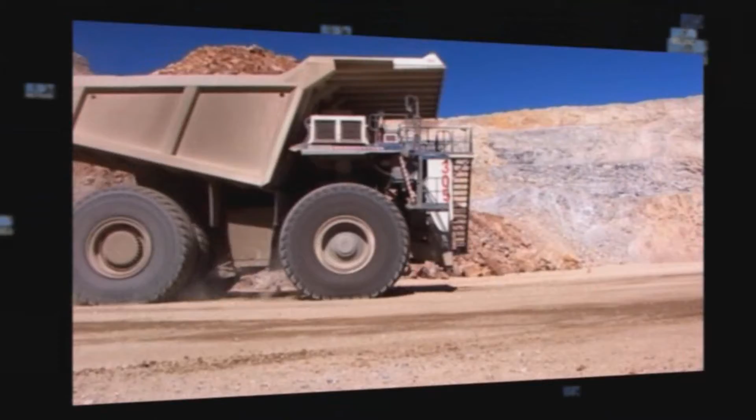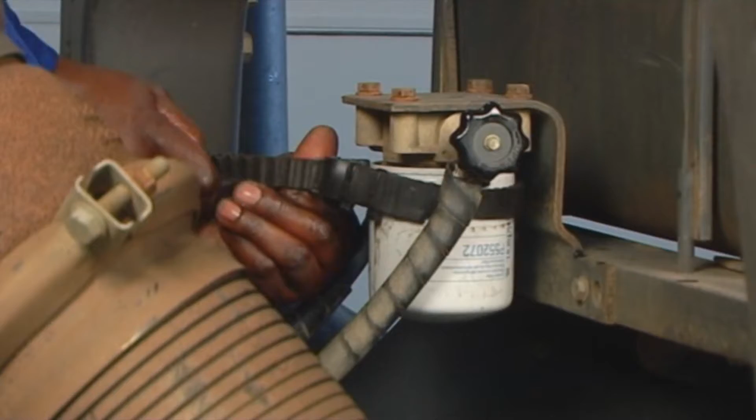One of the keys to consistent coolant performance is good service practices. With this in mind, the Donaldson Company has prepared these step-by-step coolant filter service guidelines. Before we look at the actual filter change-out steps, here is some important servicing information.

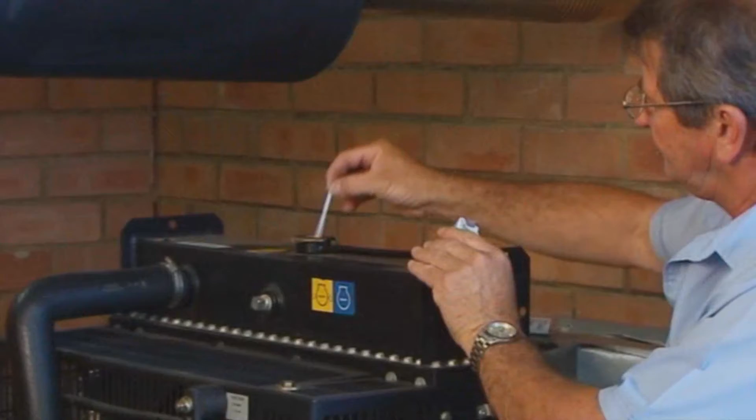Never use pure antifreeze, as it provides less protection than a water-antifreeze mix. In traditional water glycol systems, Donaldson test kits can be used for a quick 1-minute test that helps you maintain the cooling system chemical balance. Donaldson recommends testing traditional water glycol coolant systems at least twice a year.

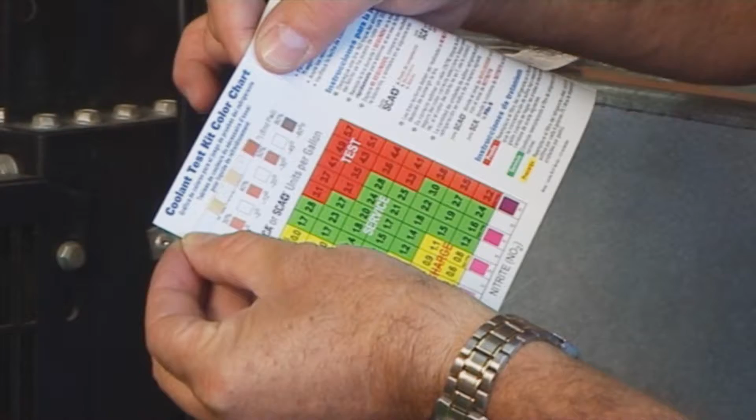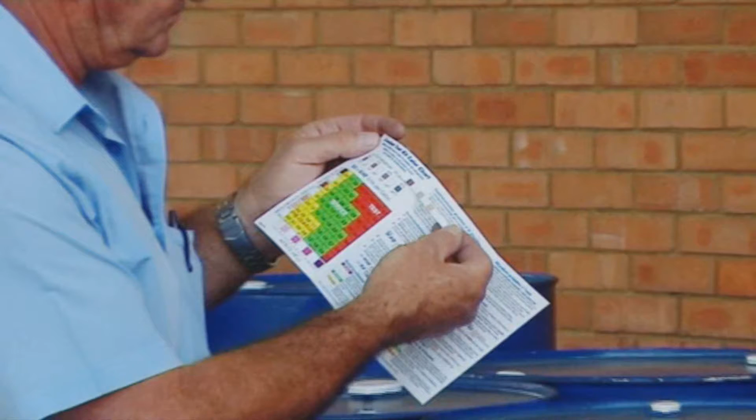Donaldson test kits are intended for use with SCA and SCA Plus systems. Full instructions are included with the kits. Systems using non-traditional organic acid technology should follow manufacturers' recommendations. Due to the difference in the chemistry of additives in organic systems, test strips cannot be used for testing organic additive levels.

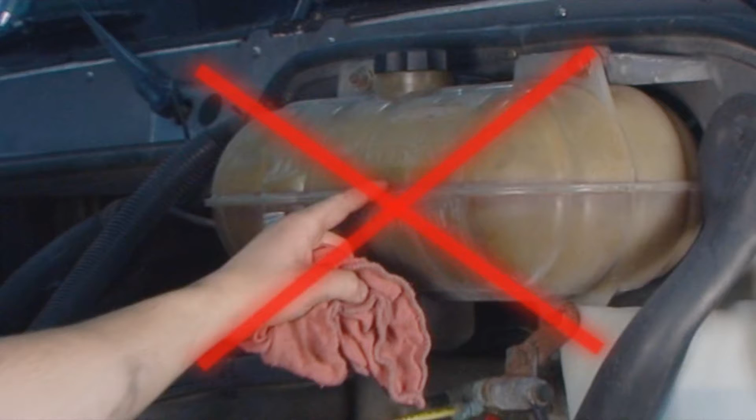To avoid system pressure and heat, the unit to be tested should ideally be allowed to cool overnight. To test, remove the radiator cap or take a coolant sample from the system petcock if so equipped. It is not recommended to sample from the radiator overflow reservoir. If using a petcock, drain off the first few ounces or 60 milliliters before taking the test sample.

Place the test strip into the coolant in the radiator or coolant sample. Remove, and after 1 minute, read the results according to kit instructions. If your traditional coolant system additive is below 1.2 units per gallon, or 3.8 liters, replace the coolant filter and add a pint or 0.47 liters of additional liquid per each 4 gallons or 15.1 liters of coolant.

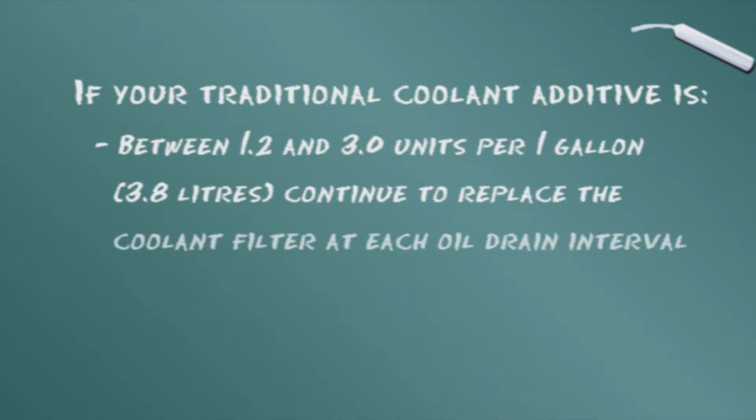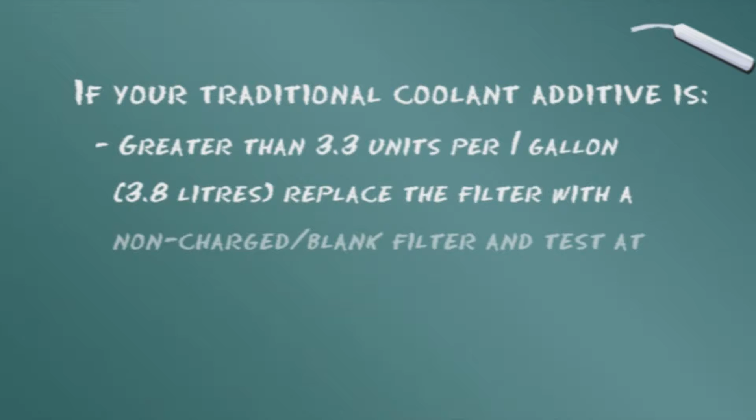If your additive is between 1.2 and 3 units per gallon, or 3.8 liters, continue to replace the coolant filter at each oil drain interval. If your additive is greater than 3.3 units per gallon, or 3.8 liters, replace the coolant filter with a non-charged or blank filter and test at the next service point. Repeat this as needed until the additive concentration falls below 3 units per 1 gallon, or 3.8 liters, when tested at each subsequent service interval.

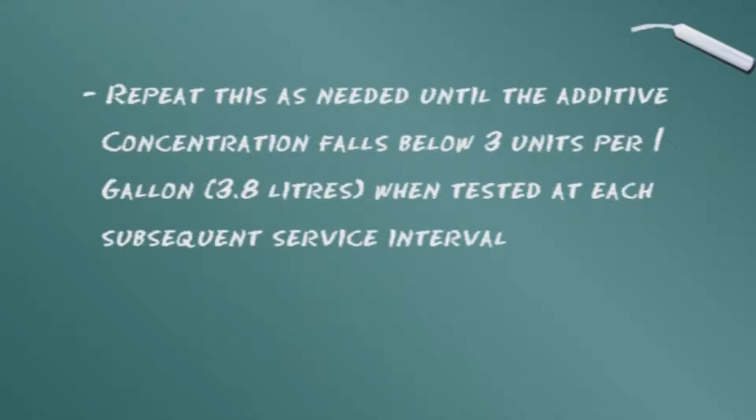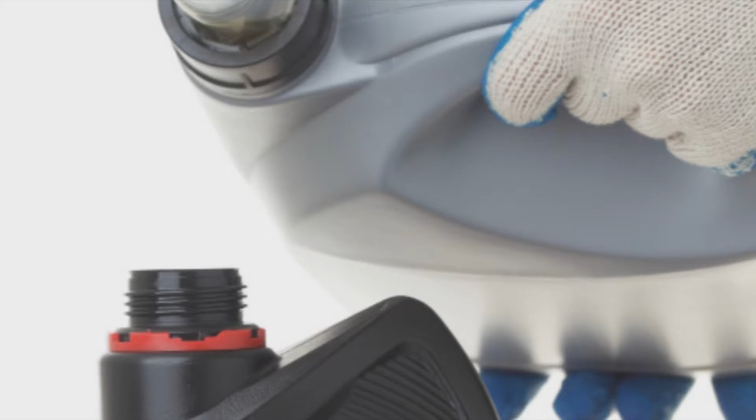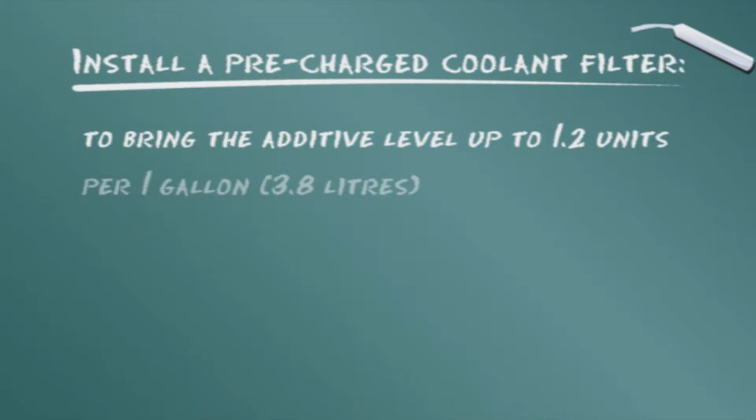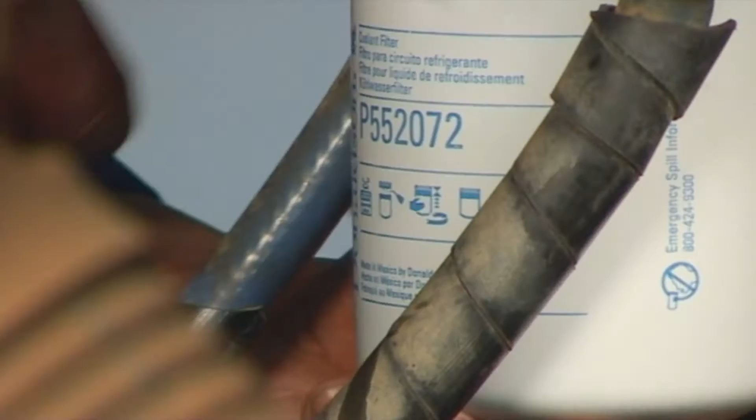Periodic drain and flushing to clean a system is important because while coolant filters capture large contaminant, sediment can accumulate. After flushing, the system should be refilled with the 50-50 water glycol mixture. Then install a pre-charged Donaldson coolant filter to bring the additive level up to 1.2 units per 1 gallon, or 3.8 liters. Alternatively, you can use a service filter with a lower pre-charge together with liquid additive to reach this desired service point level. Information regarding the Donaldson filters and service steps is simplified by pictograms on the filters themselves.

Now here is a brief review of the pictograms that are printed on the side of Donaldson filters. Remove the radiator cap. Do not use tools. Clean filter base. Lubricate gasket with motor oil. Never use grease or fuel. Hand tighten until the gasket contacts the base. Complete tightening for indicated number of turns. SCA coolant chemical. SCA Plus coolant chemical. Recycle symbols in different parts of the world. Donaldson's proprietary Synteq media used to manufacture the filter.

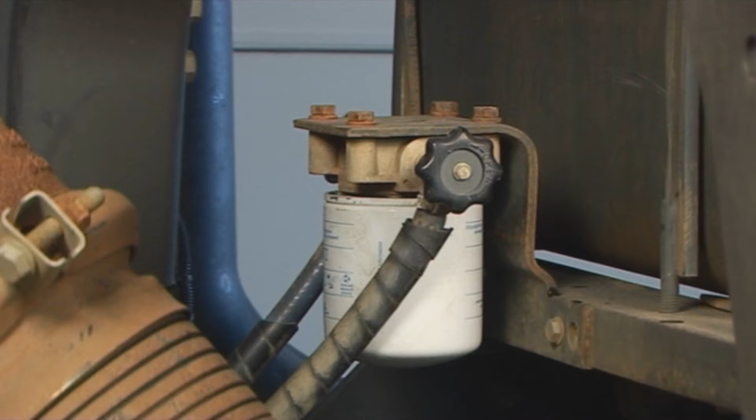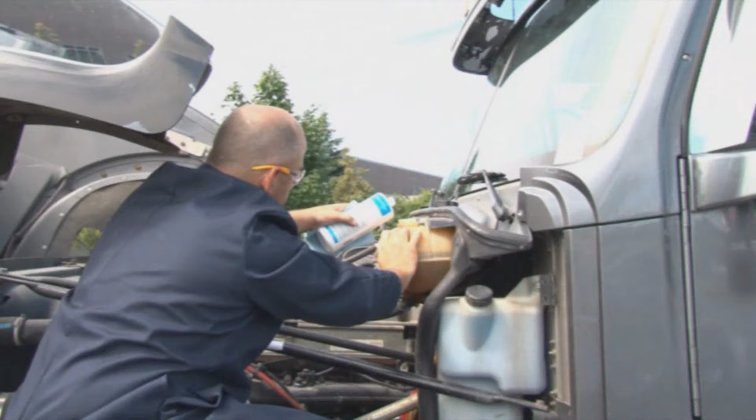Now let's discuss maintenance of the coolant system. When a cooling system is serviced, coolant filters are replaced dry. They are not pre-filled with any fluids. After coolant filter installation, the coolant fluid mixture is poured into the radiator overflow reservoir. When performing a filter change, it is best to use a clean cloth during the servicing process. Be sure to dispose of used filters properly.

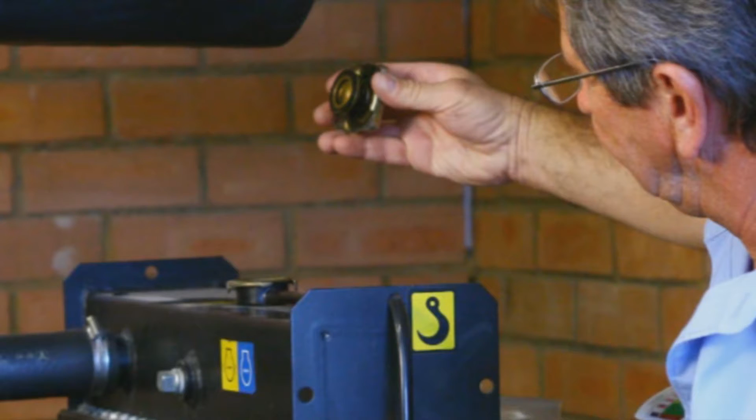Now here are some recommended coolant filter change-out tips. Before installation, remove the radiator cap. Caution: follow the safety precautions from your engine manufacturer. Be careful since the radiator cap may be hot and the cooling system may be under pressure. Unscrew and remove the old filter. Remove the old filter gasket if one is still attached to the base. Wipe the filter mounting base or head with a clean cloth.

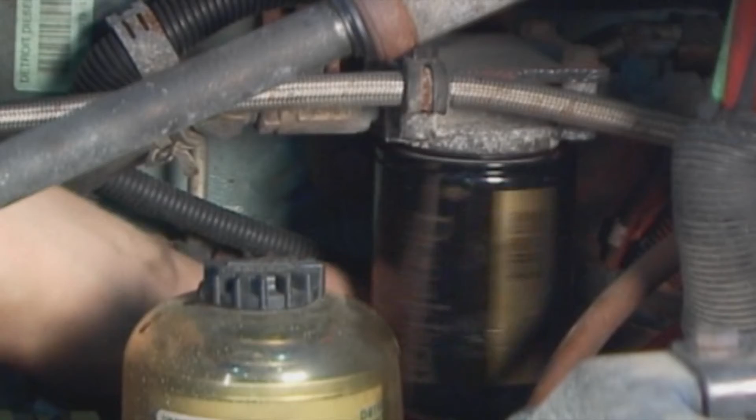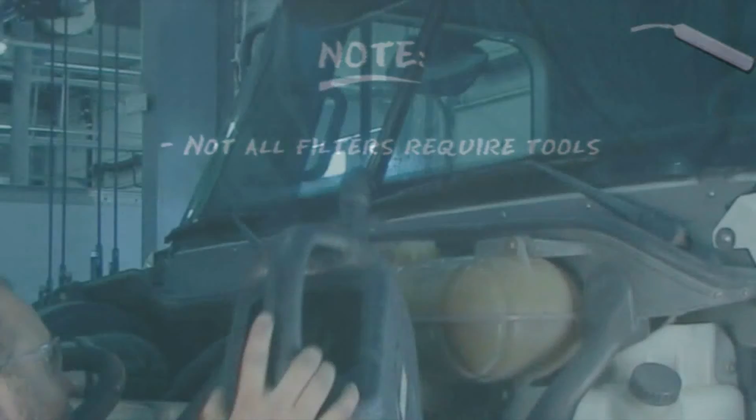Check to ensure that the gasket on the replacement spin-on filter is in place. For installation, apply a thin film of clean motor oil to the new filter gasket. Do not use grease or fuel. Line up the filter threads to the mounting base and thread the new filter on until the gasket contacts the base. Follow the instructions on the filter for a final tightening torque specification. Do not over-tighten. Note that not all filters require tools. After installation, pour the coolant fluid mixture into the radiator overflow reservoir. Start the engine and check for leaks.

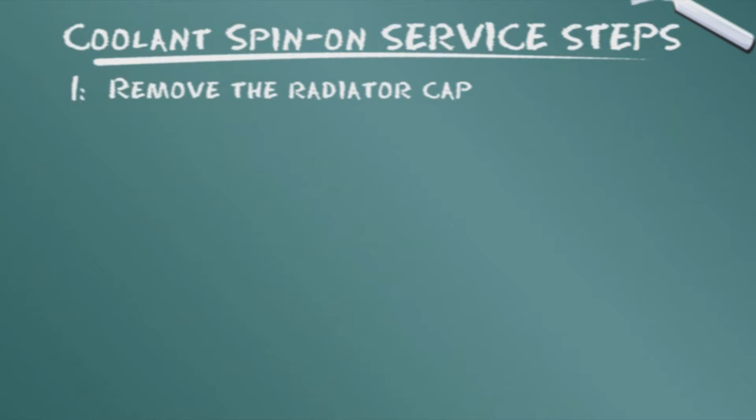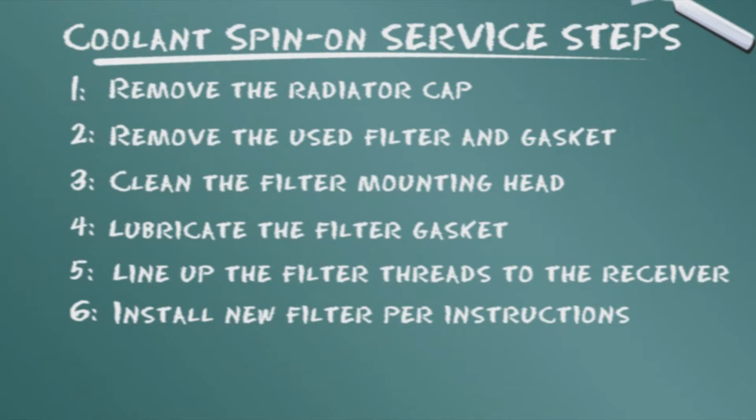Let's summarize the service steps presented. Remove the radiator cap. Remove the used filter and gasket. Clean the filter mounting head. Lubricate the filter gasket. Line up the filter threads to the receiver. Install new filter per instructions. Start engine and check for leaks. This servicing information is provided as a best practices guide. It is not, however, intended to replace or supersede the service instructions supplied by your engine or vehicle manufacturer.